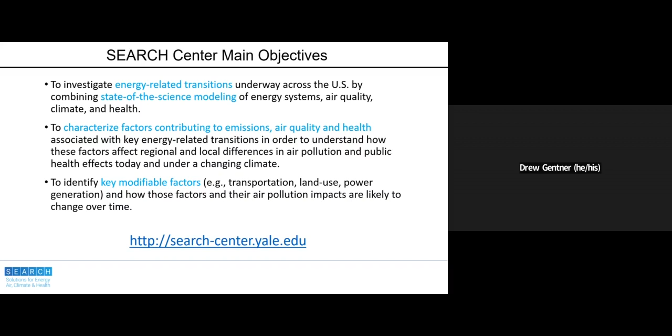This fell under the purview of our SEARCH center, which Michelle Bell has been the director of up at the School of the Environment, and we're in our last year of the center now. The overall objectives were to look at energy transitions and the wide range of sources related to energy production and use, in the context of other sources that affect urban air quality and health. We paid key attention to both transitions and key modifiable factors—things we can change, either through policy or personal choices, so that we can make smarter decisions related to transportation, land use, and our power generation and distribution networks.

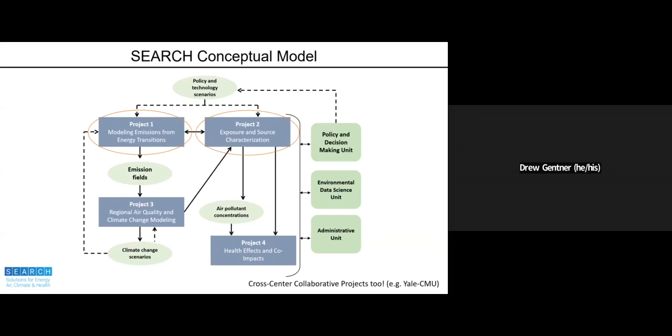This had a number of different projects involved. Ken's project was number one, and mine was number two. We were doing this in collaboration with Johns Hopkins, and we had a couple other projects. These were focused on distinctly different areas of air quality, where I was focused more on source characterization and measurements in project two, and Ken was doing a lot of modeling on energy and emissions. This project represented one of a couple things we were doing as intercenter collaboration within a much larger center structure. You can check it out online and see a lot of the other great work coming out of Michelle Bell's group and others at Yale, Johns Hopkins, and our partner institutions, which span some co-PIs at Johns Hopkins and other PIs, and Dan Esty up at the School of the Environment.

So onto this paper—let's dive in and focus. This started at a workshop that Ken and I were at when we were talking about this research question, thinking about how climate and health benefits intersect when we look at building energy efficiency measures. Ken's group was thinking about building energy efficiency scenarios, how we reduce energy use in the building sector to reduce CO2 emissions and affect change for climate mitigation. I started asking, well Ken, what about the indoor air quality on that? We're going to drop outdoor emissions of pollution from reduced energy production, but what happens with the building energy efficiency measures indoors? And so thus, this project and this paper was born.

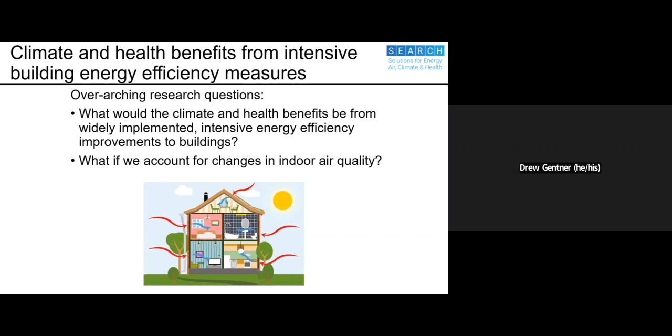As a brief overview of where we're going with this today, we start with the fact that buildings account for 40% of energy usage. That's a lot of our energy demand nationally, so it makes it a really prime target for climate change mitigation and reducing both energy use and associated emissions.

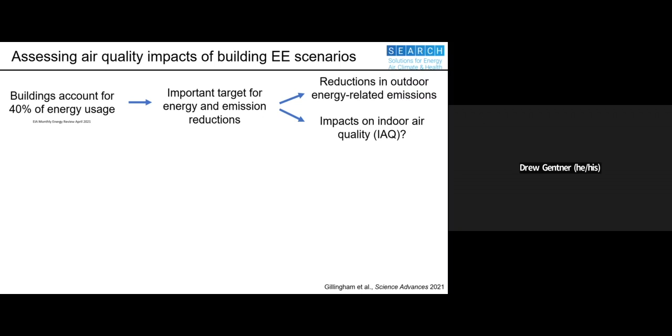These are emissions of not only climate pollutants, but also air pollutants like particulate matter, sulfur dioxide, carbon monoxide, and nitrogen oxides. So with these scenarios I'll show you in a moment, we looked at reductions in energy-related emissions occurring outdoors from power generation, and then translated that to its effects on indoor air quality. I'll talk about that feedback loop in a moment.

The approach here is to use the Yale NEMS model, which Ken runs up at the School of the Environment, to look at energy efficiency scenarios across the entire U.S. housing stock. So we're not just studying one building, we model all the homes in the U.S. and their changes over time with a lot of simulations and a couple of interconnected models.

Then we evaluated the outdoor and indoor air quality implications. So how do the changes in emissions affect exposure and human health, both through outdoor and indoor exposure pathways, and then look at the net effects on human health of these together.

I'll walk through this in a bit more detail, but we start from a reference scenario, an intermediate energy efficiency scenario just for buildings, an optimistic energy efficiency scenario for buildings, and look at the changes in energy consumption, and then test the carbon pricing scenario for those to see how that affects it.

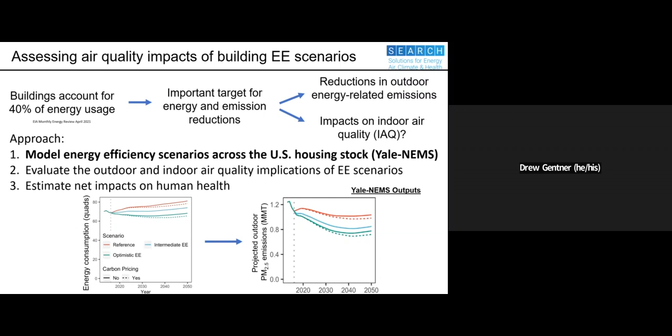We'll walk through this a bit more, but if you fast forward all the way, you can see how we will then be able to look at projections in particulate matter emissions from that reduced energy use.

So the scenarios, without going into them in great detail, though there's a lot of information in the paper, and Ken would be happy to answer questions, look at changes in both appliances and equipment and in the building shell.

So we have all of this stuff indoors for heating, cooling, cooking, lighting, and other things like refrigeration. And those have a certain amount of energy use with them, and that's been a target of a lot of governmental programs to improve efficiency.

You can go and buy Energy Star things. You see them if you go to the store. And so there are targets related to the energy efficiency of those.

And then in the building shell is where we start to look at the interconnections at indoor air quality, because the indoor environment is really complex. The air that gets to us here, or the air in your home, navigates a lot of places, either through a forced air system or just naturally.

You have some penetration coming through the walls and some infiltration of air and the pollutants coming in, and some ventilation of the air going out. You may do that on purpose, opening a window, a door, turning on a fan, or that might just be happening naturally.

And depending on the age of your home and how well it's sealed, that could be happening at quite a high rate. So we look at the changes in the building shell across a range of environments, and we're going to talk more about residences today because that's where we do spend most of our time, and a lot of our PM 2.5 emissions indoors occur in our residences.

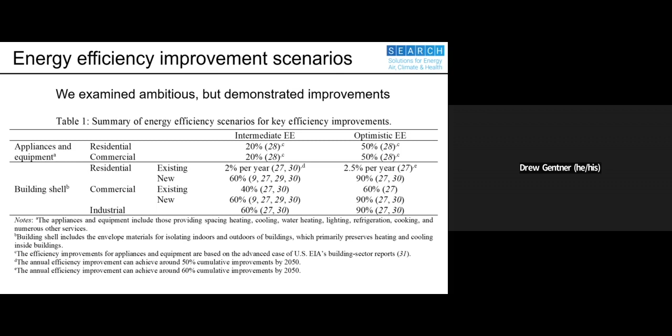So Ken's model, which is the National Energy Modeling System model, that is the Yale installation of this, and it's the large model developed by the US EIA, covers a whole lot of things in the supply side, conversion side, and demand side of electricity, and integrates it together.

So where we're going to focus on today for this paper is looking at the changes in the residential demand and commercial demand that are derived from these use changes in energy efficiency.

So if we change the design of a building, we're changing the energy demand there, and that has feedbacks to reduce demand, to reduce production, and thus we have changes in efficiency.

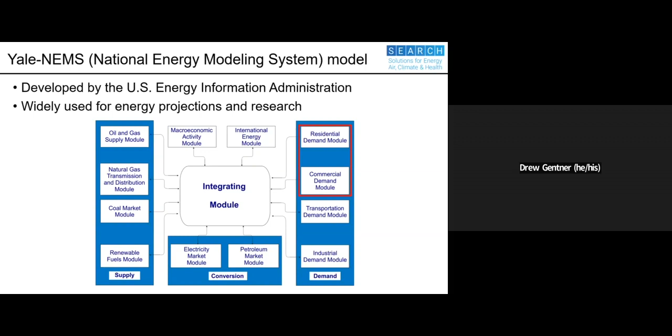So there are a lot of things that are in this model, and if you are a big fan of supplemental information sections in papers, I encourage you to check out the somewhere around 55 pages that exist in the paper, with hopefully every question you might have about the energy modeling system and Kenneth's other great work using this model.

And so if we look at the scenarios, you have the reference case at the top here in red that we play around with the carbon pricing initiative on there. And then we look at the intermediate energy efficiency just for buildings here and see that that drops consumption down somewhat, and a more optimistic one without carbon pricing.

So this really points back to that fact that 40% of our energy use occurs in maintaining our buildings and in our buildings. So any change we make here at a policy level has a pretty sizable effect on energy demand and related climate pollutant emissions.

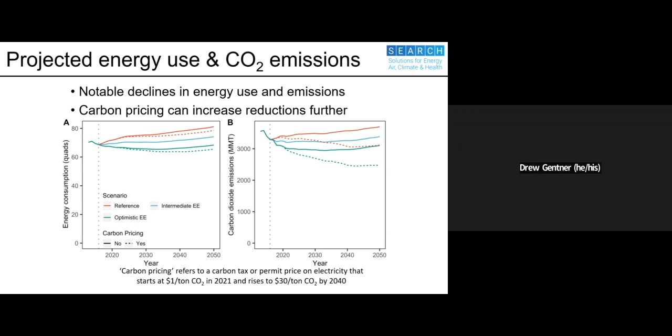This also has a sizable effect on air pollutant emissions, like criteria pollutants for particulate matter, NOx, SO2, VOCs, some effect on ammonia and carbon dioxide, carbon monoxide, though today we're going to focus mostly on PM 2.5, since that is the driving factor of premature mortality and was the key pollutant of interest for this paper.

So here we've defined what the changes are for each of these scenarios over this time horizon extending to 2050 for the energy-related emissions that are occurring outdoors. So if you want to visualize it, what's coming out of the smokestack for PM 2.5 emissions.

So that's going to vary a little bit across the country where we generate that power, how we generate it, and so we'll talk about that at the end of the presentation today.

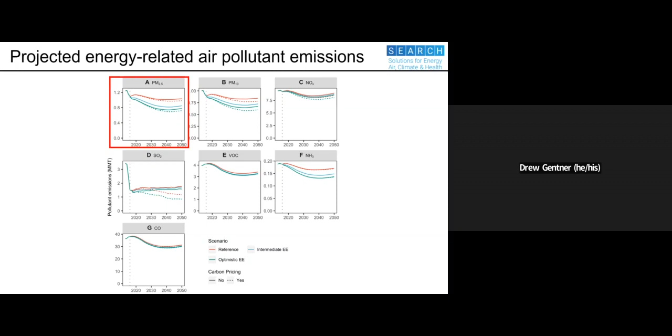So we spend close to 90% of our time indoors. So when we're thinking about exposure to pollutants, we really need to be considering that indoor environment and how it modulates our exposure to pollution coming in from outdoors, but also how the design of that indoor environment affects our exposure to pollutants that are generated indoors.

Now, I wish I had Jordan Peccia here with me today so he could answer all of your COVID-related questions related to ventilation and filtration, because that is not my area of expertise.

But you can take this emissions term here and think really about whatever pollutant or microbe or anything that you want for your own work, and think about how that's affected by the design of your home or the space that you're currently in. This is a box model.

It is actually simplified considerably to just a singular box representing a space indoors. But yes, there's still one equation. For that, I apologize. Ignore the equation if you like, I can try to cover it up. And we can focus on the terms that are used here. So I'm going to point out a few things and how the model connects, just to try to show how this all comes together.

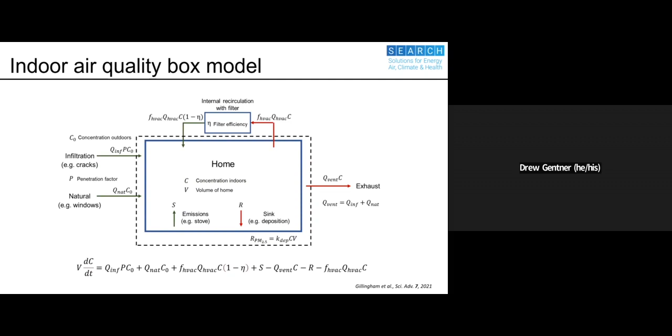Colby Buehler, a PhD student in environmental engineering, did a literature review of the U.S. housing stock, working with Peg Long from the School of the Environment, to determine the filtration flow rates for homes with HVAC, the fraction of homes with HVAC systems, and the quality of filters in there. If we were all talking about this a couple of years ago, you would probably not be very familiar with the quality of filters that exist in these systems. But there's this whole rating system—2, 4, 6, 8, 10, 12, 14, goes up to 16, then we get to the HEPA grades. That has a major effect on the efficiency of those filters and the filtration of particles indoors, airborne microbes, dust, or anything else.

The infiltration and natural ventilation rates are also affected by home age. So you think about infiltration—a home with more cracks, more gaps, has more infiltration through those penetration points.

Then the Residential Energy Consumption Survey was used to determine appliance usage across all homes, so we can look at the distribution in homes. Obviously it comes down to how many people live in a home, but some of us are cooking all the time—we cook at home every single night, we use the toaster while we're using the stove, while we're using the oven. Some people will stop by and pick up something from the local waffle shop for dinner most nights—not much to cook. That's going to have a huge effect on this emissions term, and it's going to propagate through this whole system, as you'll see later.

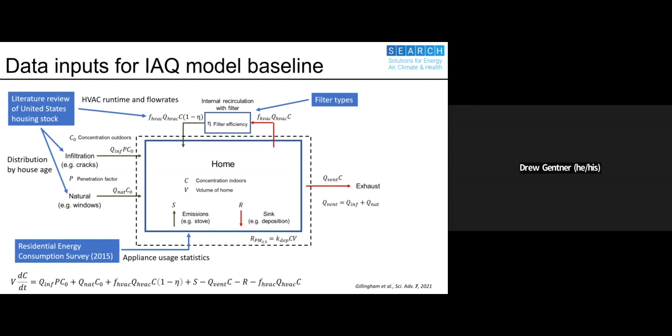So we then model over time the changes in the U.S. housing stock up through 2050 for this analysis, and changes in the building type, which includes the volume of homes—sizes are going up—the amount of new homes being built, and the characteristics of those homes with respect to installation of HVAC systems, filter types, and all of that. Ultimately, the big effect that this has, with the changes in the housing stock and energy efficiency scenario, is on this infiltration.

So how much ventilation occurs in your home without you actively doing it? You didn't turn on the HVAC system, you didn't necessarily open the window, but you have some pressure changes in the home, and the air is also very good at moving through cracks and things. If any of you just moved to New Haven, wait till a nice cold day, go stand near a window in an older building, and you'll certainly feel that cool air coming through some of those gaps. I know I had that experience when I first moved to New Haven.

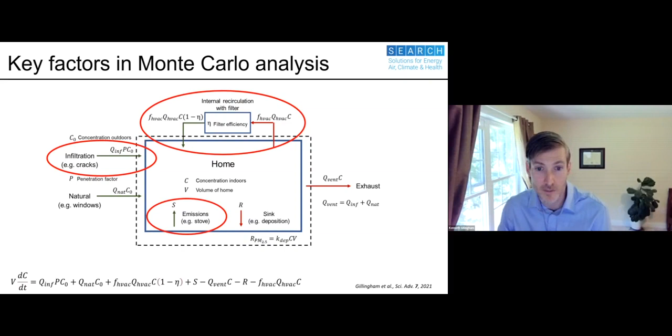Yuan, to answer your question, the exact materials used to change building efficiency in terms of insulation are not explicitly worked in here, but they are part of changes in building shell efficiency. In the paper, we discuss how changes in insulation versus changes in building sealing could affect the ultimate outcome. All right, so participation time.

How many people in the room have an HVAC system in their home or apartment? Okay, so that number came in at about 10%. I don't know, hands are really kind of low on there. So now is where we have a choose-your-own-adventure moment in the presentation.

So for those who are in homes that do not have... it's going to come back, I promise. All right.

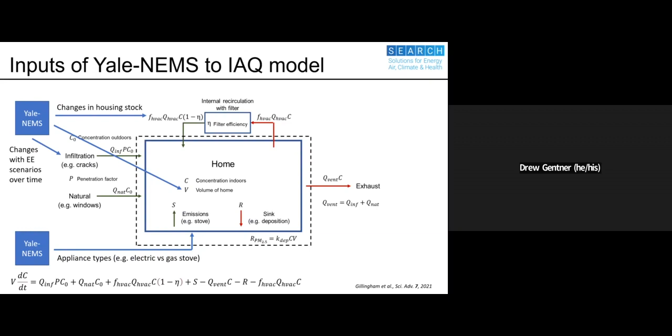The only major everyday exception to that for a lot of us would be in some of our labs. We have a fume hood, and obviously we dump all of that out of the building—we don't recirculate that. There were also some changes in various buildings on campus where the percentage of fresh air versus recycled air was changed over the past couple of years.

All right, so if we think about this effect, this is looking at the overall effect for the entire U.S. housing stock, for these two types of homes across new and existing. Then we have this result where we end up at steady state having higher overall concentrations.

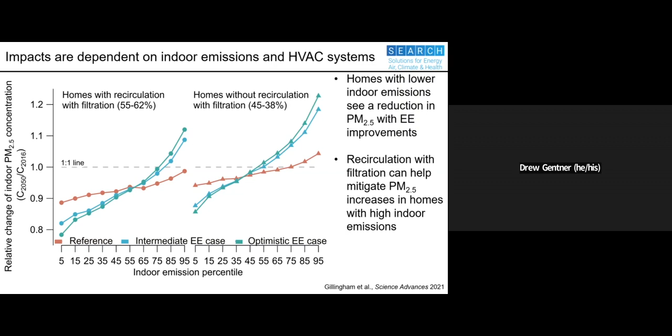If you want to visualize this more as what's happening for any singular event, you can think about the response time to something. So if you just look at this as a singular case, let's stick with the burning toast scenario: you burn toast, or you were frying something, you generated really high concentrations, and then you stopped. How long does that take to decay down? Specifically, we think about that as the e-folding time, down to 1/E, or 37%.

And so we look at that in the different scenarios with and without filtration. One other point I wanted to make about your quick filtration question is that in a lot of homes, we're not recirculating air at a rate of like the entire house every 6 minutes or something.

During COVID, we increased some of those ventilation rates for public spaces, targeting an air exchange rate of 4 or 5 air exchanges per hour, but we're not changing everything.

So that's why there are some differences here with the filtration and recirculation, dropping it quicker in the cases of having an HVAC system.

And then you can see, as we tighten up the building more and more in the optimistic energy efficiency case, the time spent with the effects of burning your toast or whatever else happened indoors increases, and here we're approaching up to twice as long.

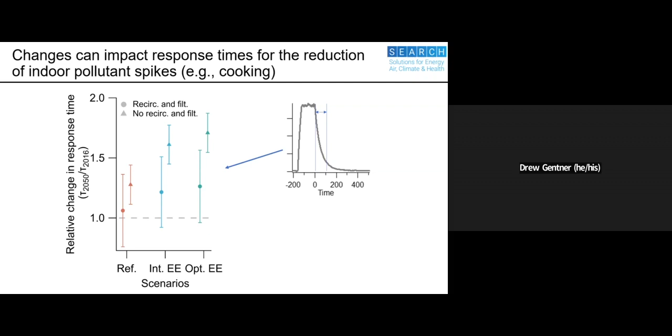But we know that the system is sensitive to outdoor PM concentration, so we did all this modeling. And then we did a couple of case studies across all different outdoor PM concentrations and looked at how the system responded to outdoor PM.

Because if we go back to that box model—and I won't put it back on the screen again—remember we have the concentrations of PM outside that's trying to come in, and then we have our indoor PM that's going out. So we have this really complex game happening over the building.

So depending on where you live and even time of year, or if it's a pollution event, you're going to fall on different spots.

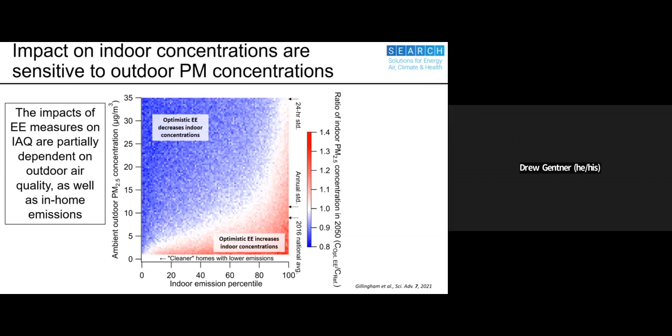Okay, so to wrap this up and look at it together: I said we wanted to look at the outdoor effects and the indoor effects. We spent a little bit more time on the indoor stuff today, but we get this huge gain from the reduction in outdoor PM 2.5.

We just talked about the complexity of indoors, and so overall we see a detriment indoors. But this is not for every home, because there are many homes that see a health benefit from the energy efficiency improvements based on this modeling.

Those graphs I showed you before with lines across them for HVAC and non-HVAC show that there's a fraction of homes that see a detriment and a fraction that see a benefit from this. But overall, this positive outdoor effect offsets the indoor effect, weighted towards a subset of homes and a subset of the population.

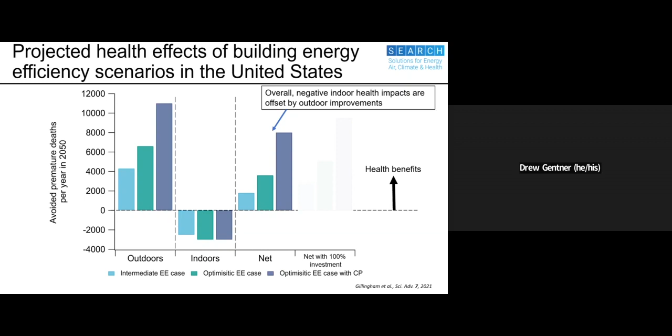That's what I said in summary. We wanted to test how the effect of HVAC usage or filtration systems affected this. So if we look at the case where we upgraded all homes to have 100% good HVAC systems, boosting that investment up, we can actually increase the health benefits that occur.

Basically, if we improve indoor air quality through improved filtration of PM 2.5 indoors, we can achieve a larger benefit there. This can be summarized as: reductions in outdoor emissions yield a net benefit across the entire building stock, and the observed change in indoor air quality due to these energy efficiency improvements really requires us to think about improvements.

We need improvements to our indoor PM 2.5 emissions—targeted ventilation of those emissions, so better ventilation of cooking emissions, improving PM 2.5 filtration efficiency, so upgrade your filters for better efficiency where you can—and careful consideration of these energy efficiency policies and how we look at ventilation in buildings.

This is yet another time where I wish I had Jordan Peccia on the line to make a few comments, because it's a really interesting and important topic for how we design building ventilation for human quality of life, well-being, and a range of pollutants. We present this today through the lens of PM 2.5, but we include some discussion in the paper about different pollutants that can be emitted indoors in various amounts.

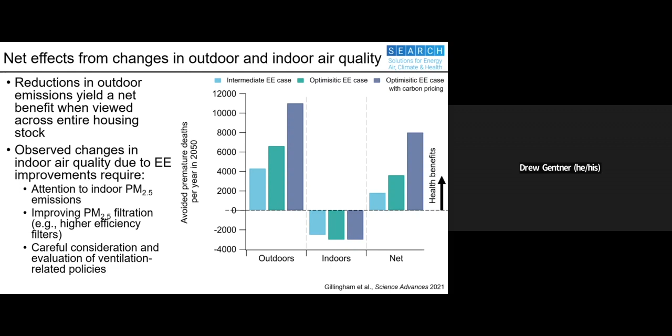These differences come down in many ways to how power or electricity is generated in various areas of the country, so we see some of the largest benefits depending on the case. Carbon pricing will have a slightly different effect than the optimistic case on its own, since it changes the underlying fuel used for generating power. If we think about the Midwest and Northeast, the types of fuels used for power plants mean reducing that demand has a larger effect than in the West, where there's a higher amount of renewables.

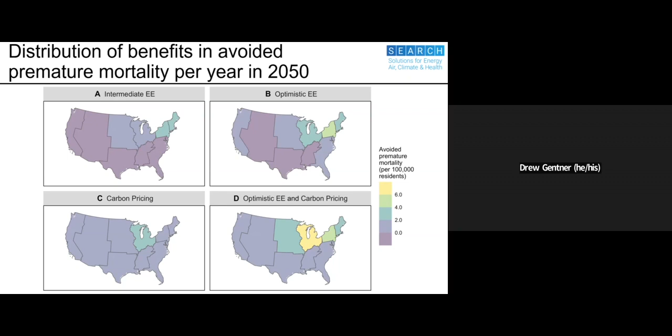So in summary, and then we'll open it up to questions with whatever time we have.

The study used the Yale NEMS model coupled with Monte Carlo analysis, an indoor air quality box model, across the entire US housing stock. We see a 6 to 11% reduction in carbon dioxide emissions and an 18 to 25% reduction in outdoor energy-related emissions of PM2.5. This doesn't include other PM2.5 sources. These reductions are complementary with carbon pricing and take the pressure off as we try to decarbonize electricity going forward.

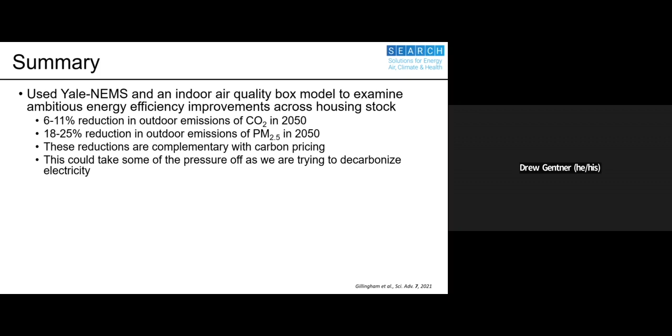So these building energy efficiency measures provide a huge opportunity, but they require attention to indoor PM2.5 emissions, improving PM2.5 filtration, and thinking about how we implement ventilation policies that address the nuances of fresh air exchange and energy recovery.

In all, the majority of homes see an improvement or little change to indoor air quality with these energy efficiency improvements, but a subset of homes have increased PM2.5 concentrations indoors, which affects their overall health effects for indoor air. Overall, we see a net benefit outdoors.

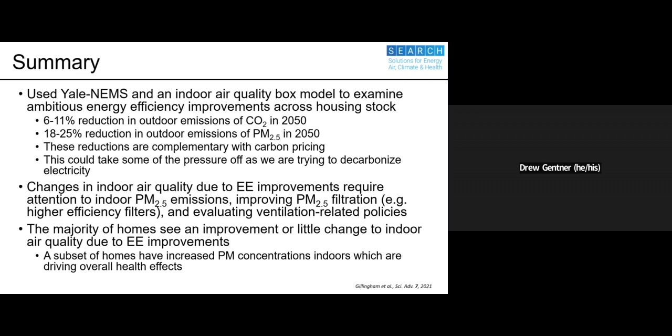Hey, could you go back to the projected impact slide? First, if there was a bar on there for, you know, without the energy efficiency measures, where about would it be?

So this is all comparisons to the reference case, to the current trajectory. So these are the changes that occur on top of whatever we expect to happen in the absence of these scenarios.

I was wondering if there are plans to extend the study out to different groups, like looking at school systems as well. Primarily interested in, are there plans to study energy efficiency models but also including other factors and other areas?